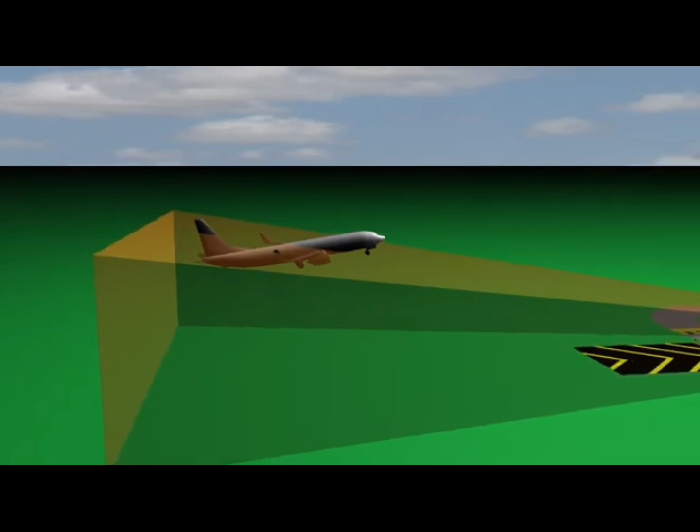The components of the airport instrument landing systems, localizers and glide slopes, are two critical NavAid components with very strict protection requirements. Both emit electronic signals that indicate to pilots precisely where their aircraft are in relationship to the predetermined runway approach path.

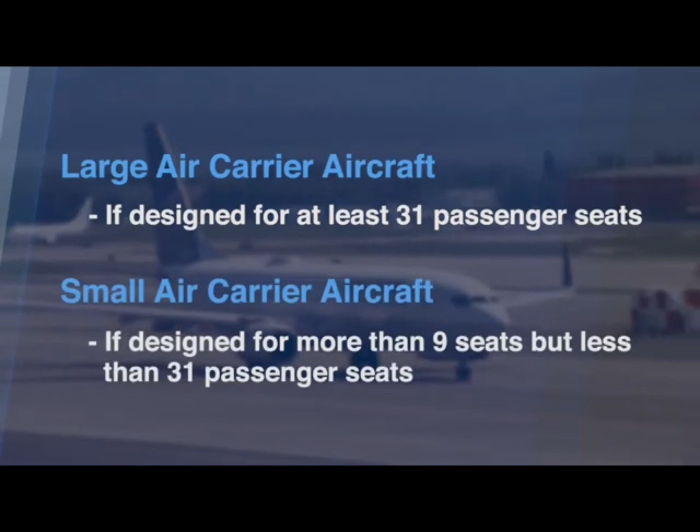Today, let's look at the runway lighting system. Runway edge lights are used to outline the edges of runways. These lights shall be placed along the full length of the runway in 2 parallel rows equidistant from the centerline. The runway edge lights have a white glow. In the caution zone, which is the last 2,000 feet of the runway, yellow lights replace the white lights. The yellow lights indicate caution on rollout after landing.

Threshold lights emit green light outward from the runway and red light toward the runway to mark the ends of the runway. Green lights indicate the landing threshold to arriving aircraft, and the red lights indicate the end of the runway for departing aircraft.

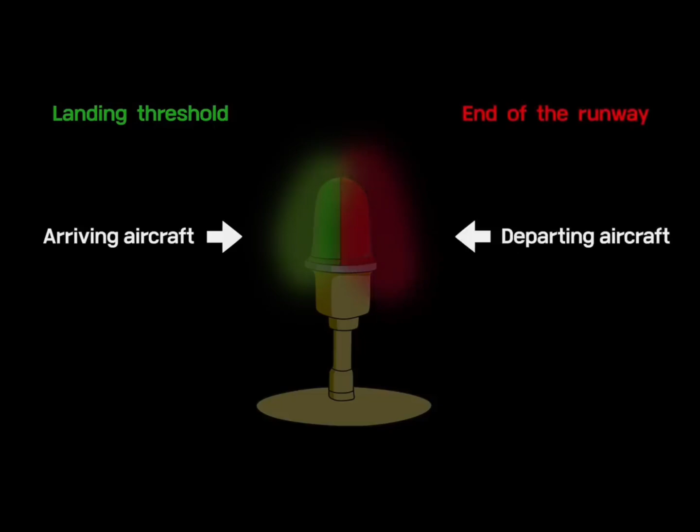When the displaced runway area is usable for takeoff, red and yellow runway edge lights are installed to delineate the outline of this area. In this case, threshold lights are located outboard from the runway. The displaced runway is not usable for landing, so threshold lights are installed in red to alert the landing pilot to this area.

Taxiway edge lighting systems are configurations of lights that define the lateral limits of the taxiway or apron. The taxiway edge lights emit blue light.

The Precision Approach Path Indicator provides visual approach slope information. The system provides a white and red light projection pattern along the desired descent path to the touchdown point. Landing pilots can determine whether they are high or low relative to the ideal glide path by checking the number of white and red lights. PAPI is generally operated both day and night.

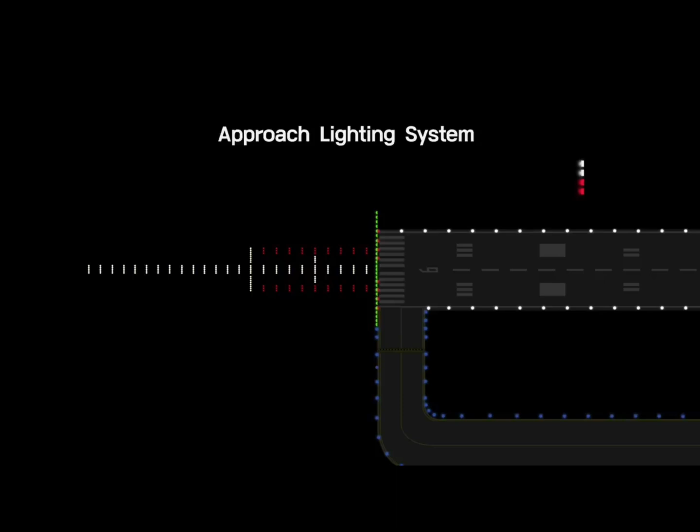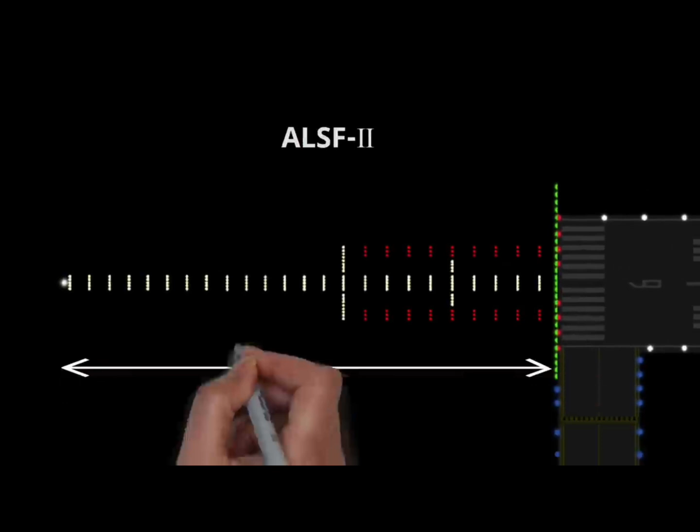Approach lighting system provides the basic means to transition from instrument flight to visual flight for landing. Pilots landing on days with very low visibility will probably notice these approach lights before the runway. This configuration is an ALSF-2, commonly used for precision approach runways, and is generally 2,400 feet from the threshold.

Runway end identifier lights can be installed in the case of non-precision approach runways, or an additional need to identify the runway threshold. This system consists of a pair of synchronized flashing lights located laterally on each side of the runway threshold. This is expressed as runway threshold identification lights in ICAO, and the primary function of the REIL is to supply rapid and positive identification of the end of a runway.

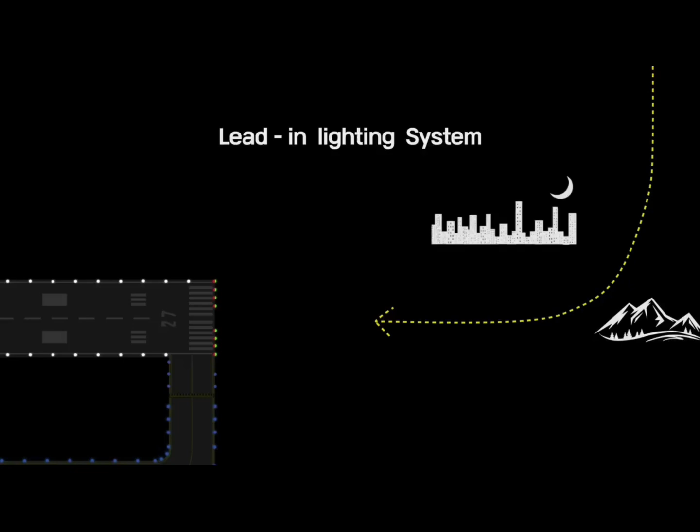The lead-in lighting system provides positive visual guidance along an approach path, either curving or straight, where special problems exist with hazardous terrain, obstructions, or noise abatement procedures. The lead-in lighting system consists of one or more series of flashing lights installed along the approach path and may be terminated at any approved approach lighting system.

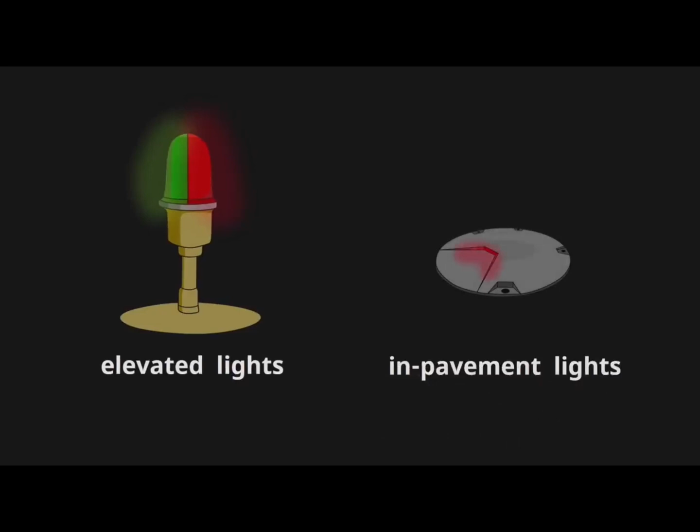Typical runway lights are lights that have some height from the ground. However, if the light should be installed on the path through which the aircraft passes, it should be made of in-pavement light fixtures. From now on, let's look at representative in-pavement lights.

The runway centerline lights are located along the runway centerline at 50-foot equally spaced longitudinal intervals. The runway centerline emits white light, but the last 3,000 feet of the runway is color-coded to warn pilots of the impending runway end. Alternating red and white lights are installed starting from 3,000 feet, and red lights are installed in the last 1,000.

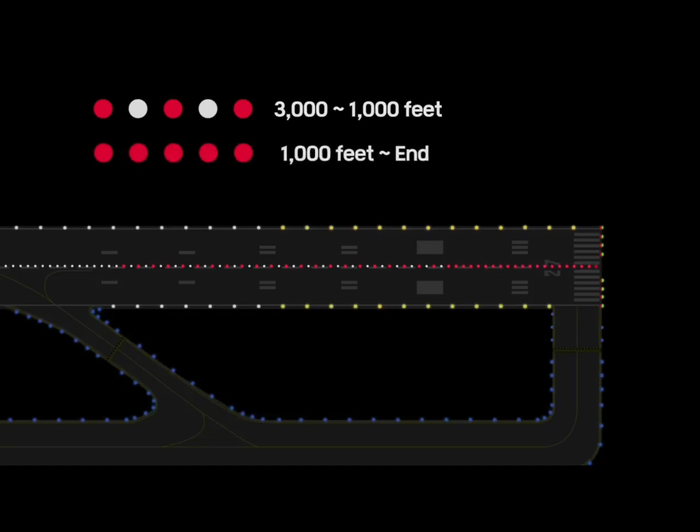Touchdown zone lights are installed on some precision approach runways to indicate the touchdown zone. The system consists of steady burning white lights, which start 100 feet from the threshold and extend to 3,000 feet. Taxiway centerline lights provide taxi guidance between the runway and apron areas. Taxiway centerline lights are green.

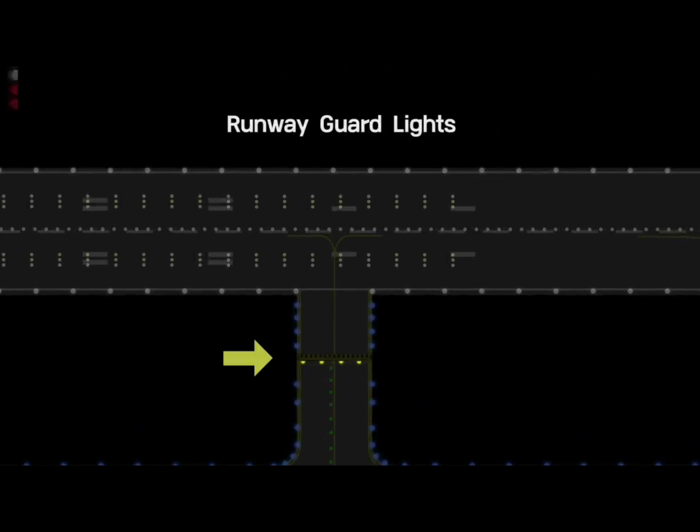Runway guard lights are yellow and should be installed at the runway holding position. They provide a visual indication to anyone approaching the runway holding position that they are about to enter an active runway.

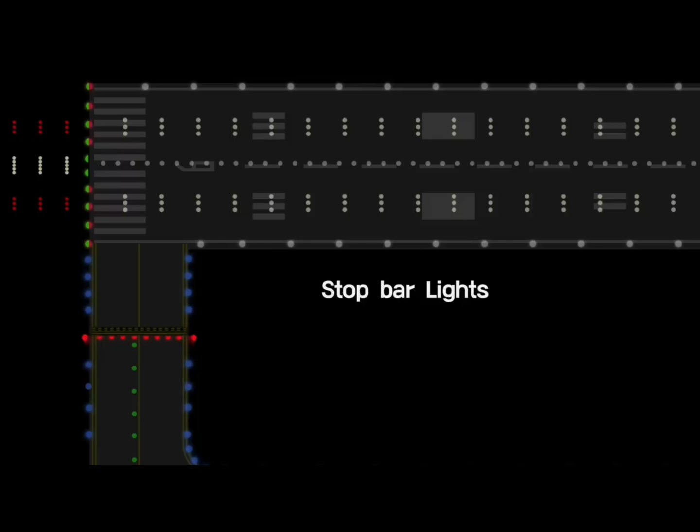Stop bar lights provide a distinctive stop signal to anyone approaching a runway. A stop bar consists of a row of unidirectional, in-pavement red lights and an elevated red light on each side of the taxiway. The stop bar lights are generally operated at low visibility conditions. Pilots can enter the runway only with the stop bar lights off and the controller's permission. It is set to be manually operated by the control tower or automatically operated by the sensor.

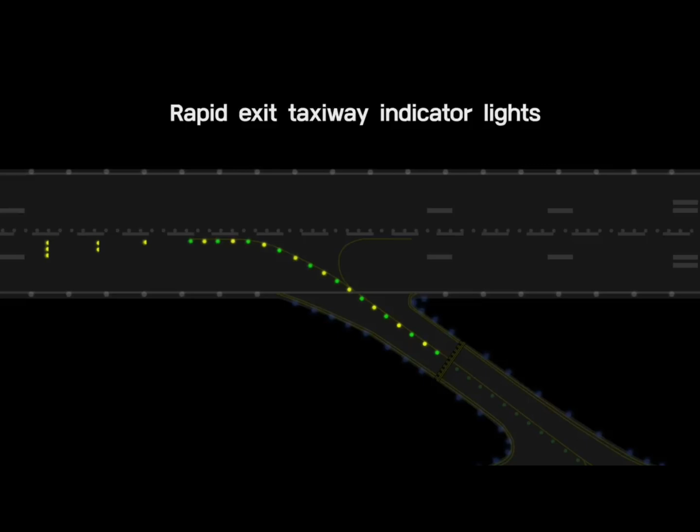Lead-on and off lights provide visual guidance to pilots entering or exiting the runway. Alternate green and yellow lights are installed from the taxiway centerline to runway centerline. In airports with rapid exit taxiways, rapid exit taxiway indicator lights are installed to make it easier for pilots to identify the location of these taxiways in low visibility conditions. Rapid exit taxiway indicator lights shall be installed with unidirectional yellow lights.

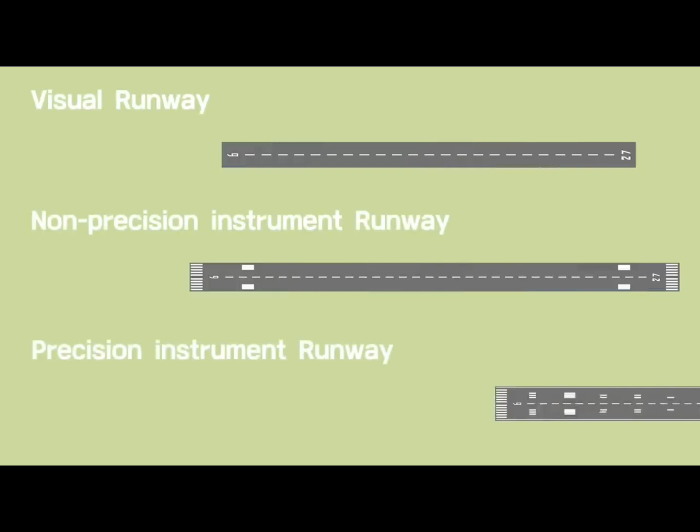In the last video, we learned that runway markings change depending on the runway type. The required lighting system is also different depending on the runway type. Every runway lighting system is operated not only at night, but also when the weather is bad. The controller at the control tower generally adjusts the intensity of the lighting based on the regulations and turns on or puts out lights. We have now learned about the lighting systems at the